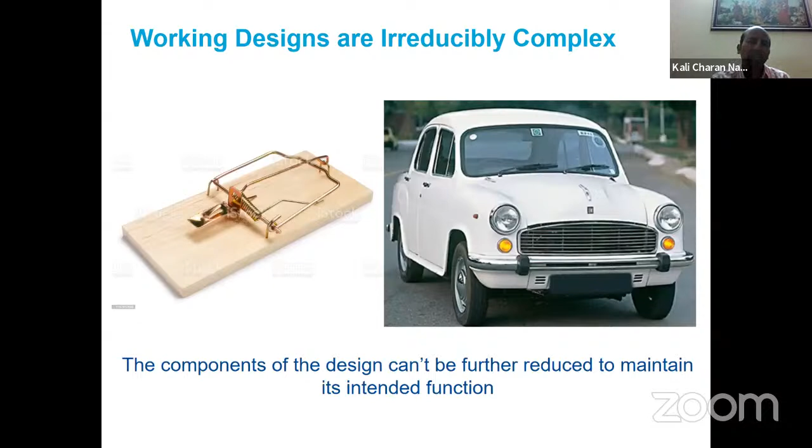For example, in the car we have 4 wheels. If you remove one of the wheels, it is no longer going to work as a car. Similarly, if you look at the mousetrap, it's a simple component with about 5 parts: the platform, the spring, the retaining rod, all that. If you remove any one of these components, for example the spring, it is not going to work. So at the very minimum, this requires these components. That's what is called irreducible complexity - it cannot be further reduced while making sure that this design still works.

So every intelligent design will be having this component or characteristic of irreducible complexity. And beyond that, what we are saying is this design is not coming by chance, or generated out of randomness, and it is not unguided. There is a factor called intelligence into it, and that is when you call it an intelligent design. So one part we discussed is the design - to work, it must be irreducibly complex, meaning it cannot be further simplified. And then there is another factor called intelligence into it.

For example, if you look at Mount Rushmore where there are the pictures of a few presidents of America - if somebody just looks at it, one cannot think that this structure has come just by rain or by deterioration over thousands of years. Somebody may think, okay, somebody had chiseled it using different tools and methods, but one cannot think that these features of the presidents of America on a mountain came just by erosion because of rain. So there is a design part, an intelligence part there. Similarly, one cannot think that a gigantic house is designed just by chance. The point is, in an intelligent design, there is a guided intelligence involved. These are the two important components of an intelligent design.

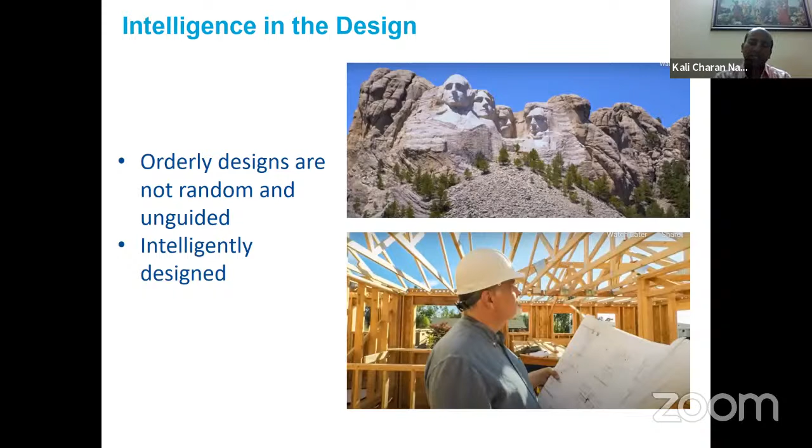Now we will look into a jet engine. Jet engine is definitely one of the marvelous creations of the human mind so far in current existence, and it is ultra complex. If you look at this cross section of a jet engine, it must be having more than 30,000 to 40,000 components. But definitely you cannot remove one of these bolts or nuts from this engine's parts.

Then it is going to create havoc, because this design has a purpose. We'll discuss what is the purpose of this jet engine. But each of the nuts and bolts and the various components in this engine has a role to play.

So an intelligent design is one which is irreducibly complex, and it is designed to perform a certain function. It has a certain purpose in it. So an intelligent design must have a purpose. That is very, very important.

It is not that we are designing these jet engines just out of our interest or something. Definitely not. So in the next 20 to 30 slides, you will see, just by looking at the process of design of a jet engine, how so much is involved.

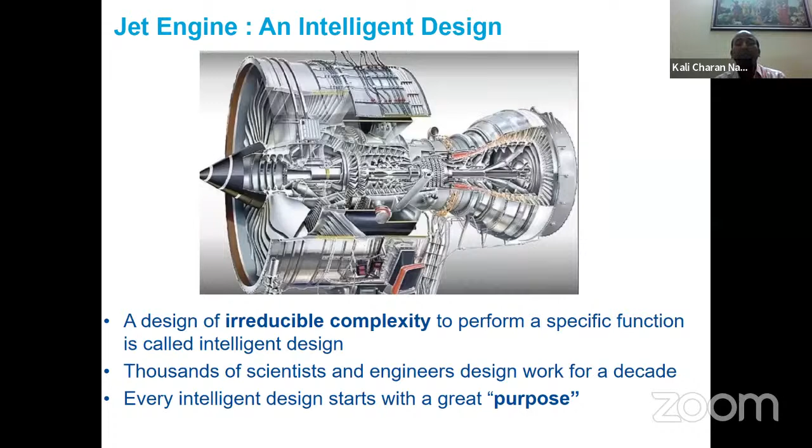So what is the purpose? Here we see an aircraft, maybe a Boeing 787, and these are the two jet engines. So what is the purpose of the jet engine? If I ask somebody from a layman's point of view, they can say what is the purpose of the jet engine. But here is the purpose told by the manufacturers.

Because the designer knows what is the purpose. We may tell something, but the designer knows what is the purpose. So here is the purpose told by GE Aviation. There are three manufacturers which manufacture jet engines: one is GE Aviation, another is Rolls-Royce, and the third company is Pratt & Whitney.

So this is the purpose mentioned by GE Aviation. I was working in that company for 13 years before I moved to Rolls-Royce. So this was what they were mentioning: the purpose of designing these jet engines for GE is not to make profit. You see, they don't say that we have to make profit or we have to build this technology. No, that is not it.

What is the purpose? The purpose is we have to invent the future of flight. Definitely a novel technology we have to develop, but the purpose is to lift people up. So they want to take people from one place to the other, lift them up, and bring them home safely.

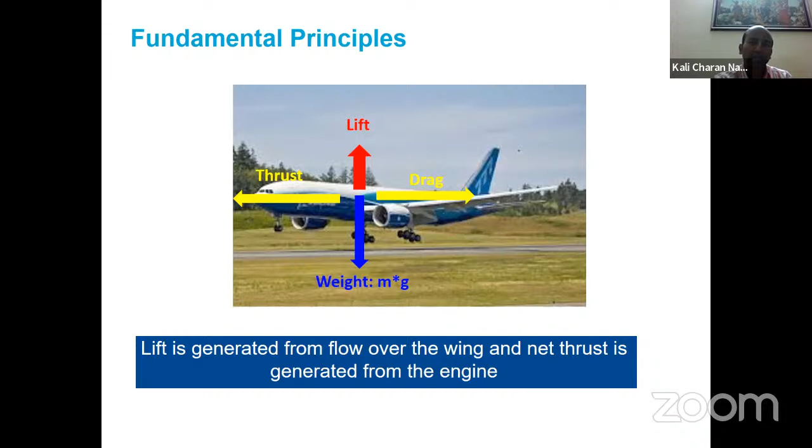So when we go and try to develop this engine, the first thing that comes is the customers. Definitely, the jet engine we develop is not something we use ourselves. We deliver it to our customers like Boeing and Airbus. So they will give the requirement, what they want. When we develop an engine, they will tell the requirement. The first requirement will definitely be the thrust, because they have to transport people from one area to another. So they will say, we need this much of thrust.

And definitely all the customers want to do business without spending anything, right? So they will say, develop an engine so I don't have to spend any fuel. But that is not possible. So instead they will say the fuel consumption should be as low as possible.

And the government agencies and environmentalists have restrictions. So if you are the manufacturer, make sure that you don't pollute our environment. You do business, but make sure you don't pollute the environment. So your smoke, carbon dioxide, or NOx should be at a certain level. At the same time, when you have an airport, the general people will have a complaint. If you have an airport nearby, make sure you don't create so much noise. So there will be a decibel restriction too.

Similarly, the other thing the customer is interested in is making sure the cost is minimal, and at the same time the amount of maintenance is less. They will also expect that at the beginning, when we design an engine, we'll have to tell how many cycles. They will say your engine should operate for 40 years, and the first time I go for a shop visit will be after 5 years. So that is essentially the life of the component. How many cycles? When we say cycles, it is like one takeoff and one landing. That is a cycle, and reliability plays a very important role in jet engines because we are dealing with the lives of people.

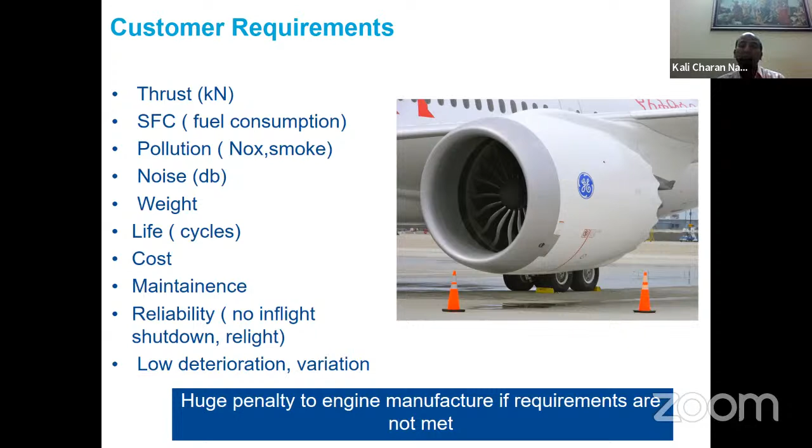But these are the requirements that come at the very beginning. So then how do we meet the requirements? From the purpose, we have got certain principles, and now we have certain requirements. So now we have to start our preliminary design. Preliminary design means we have to have an initial idea - to develop this much amount of thrust, what type of engine we have to build.

So the first is the kind of cycle - the thermodynamic cycle is a Brayton cycle. I don't know how many of you are from a technical background, but I'm trying to explain in layman's terms how much you can understand. So we come with a thermodynamic cycle.

In this thermodynamic analysis, we will essentially try to determine the size of the engine - what will be the fan diameter, what will be the core size - such that the thrust developed will be based on how much air we are taking in and out, and how many stages inside the compressor and turbine. All this will be decided at the beginning based on the thrust requirement, and they will also tell us the fuel consumption, because fuel efficiency is governed by thermodynamic efficiency, which depends on the pressure ratio of the compressor. So the compressor pressure ratio will drive the number of stages.

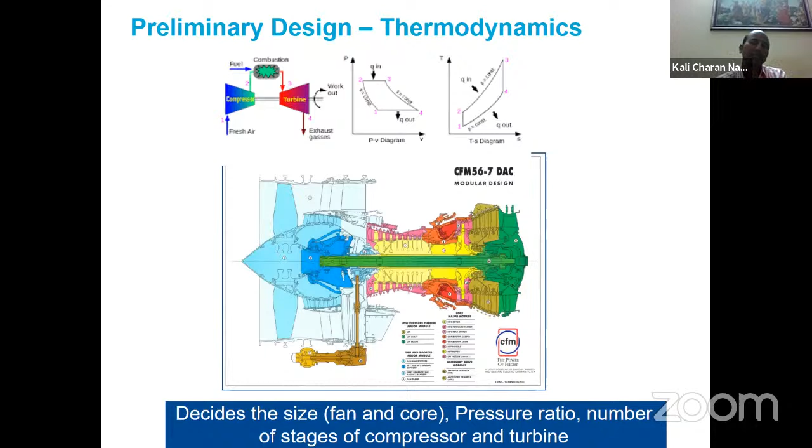So now you can see how those requirements are defining the size of the engine. We should have how many stages, how much length, weight - all this will slowly come out. So this is the preliminary design of the engine.

But at the same time, when we try to design this engine, all we want is whatever the total amount of flow we are taking, everything should be used for generating thrust. But in reality, that is not the only requirement. When we have an engine, there are so many other requirements.

For example, the passengers are sitting inside the cabin. When you are in the flight, they need certain oxygen. So where from will they get the oxygen? We have to supply it from the engine. That is what is called customer bleed - that much amount of flow we have to take out from inside the engine and provide to the customer. Beyond that, there are several other things.

In a thermodynamic cycle, the cycle efficiency will be maximum if we can operate the turbine at the highest temperature. As much higher the temperature, that much higher will be the efficiency of the engine. The technology is so advanced now that we can push the temperature high by putting more fuel into the combustor.

But unfortunately, we don't have materials in nature which can tolerate such high temperatures, like maybe 2000 degrees centigrade. So what do we do? There is an intelligent design which comes in. Essentially, I will cover how we manage that.

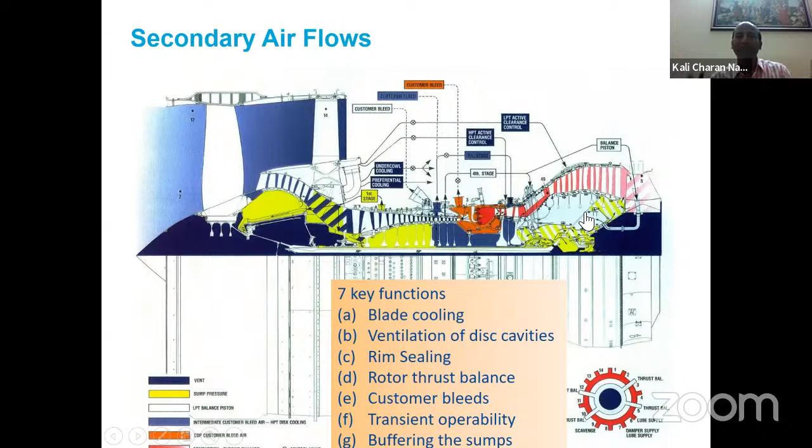It's pretty complex. At the same time, we need to make sure the engine operates for the entire mission. During taxi it goes, then within 20-30 seconds it takes off. That is a period with huge temperature gradient, and the speed will also change significantly between taxiing and takeoff - huge change in speed, temperature, all under extreme conditions.

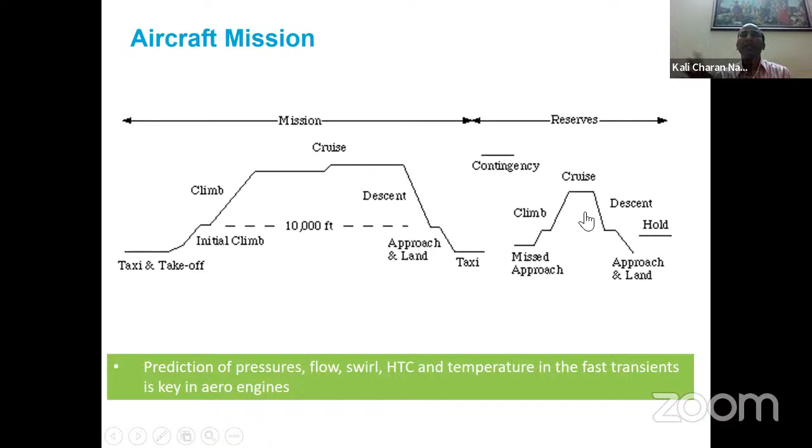We need to make sure the engine is able to operate at such huge temperatures, pressures, and environment, and these transients actually play an important design challenge as well - compared to land-based engines, where such harsh environments are not there.

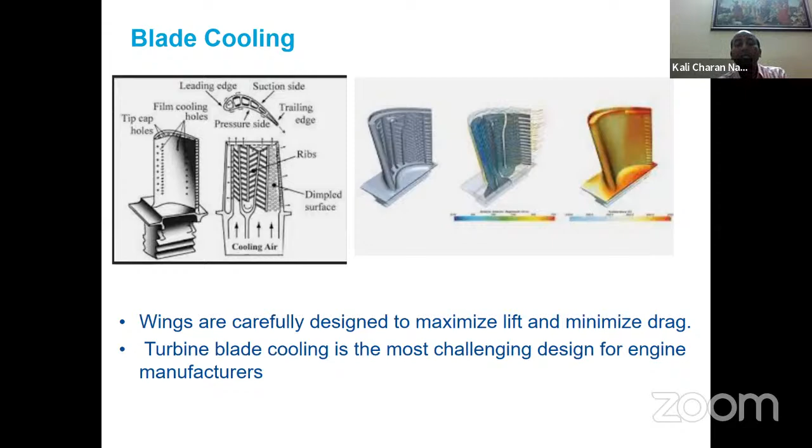So you see, such a wonderful design where you can actually operate the engine at a much higher temperature, but at the same time the material doesn't have to withstand it directly, because you form a thin film of cold sheet of air. But there is a challenge. If there is a high pressure ratio, there are other design challenges. So we have to precisely meet that. It is highly, intelligently designed.

Let me move on, I should not talk too much, might be sounding technical, but I just wanted to give you an idea, we are liking it. I'm just trying to give an idea of how so much effort, thinking, engineering and technology goes into it. It is not that this blade is just like that, or this hole is just like that.

This has a purpose. This is another interesting physics called ingestion. People still don't understand it fully, scientists and engineers still don't understand it. You see this combustion, where you are burning fire, fire is inside the engine, and this fire passes through because that is the source of energy which rotates the turbine. But what happens is this entire hot gas path is very hot, at high temperature, but the point is it is also low pressure.

But what will happen sometimes is there are stator and rotor gaps. In the flow, circumferentially, because there are blades rotating, somewhere you will have high pressure, somewhere low pressure. So sometimes this hot gas can enter into these cavities wherever the pressure is high, and go out wherever the pressure is low. But the problem is this hot gas can enter inside the cavity and go through.

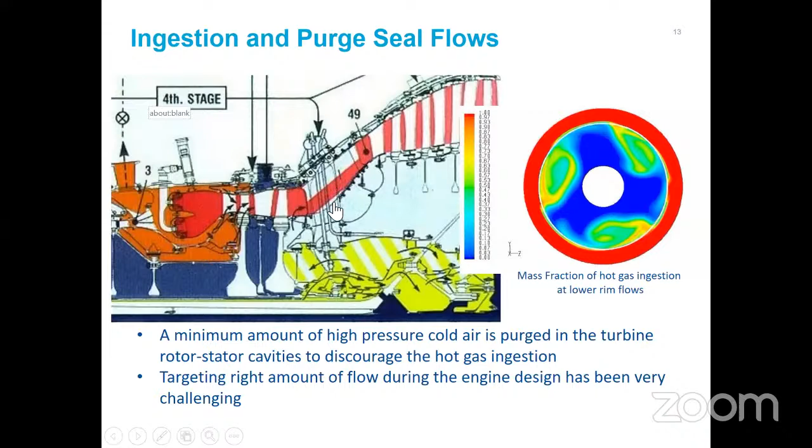So what we do essentially is take some amount of cold flow, which generally comes from this side, from the compressor, so it will have high pressure. So high pressure but low temperature, versus the hot gas which is high temperature, low pressure. So we push this high pressure, low temperature air through these gaps such that the hot gas cannot come in.

But it is not that simple. There are some complex computational fluid dynamics analyses done. Sometimes you see that this hot gas is actually coming inside, this is the low temperature and this is some mixed temperature. But we need to thoroughly understand this, and what is happening in this region is not well understood.

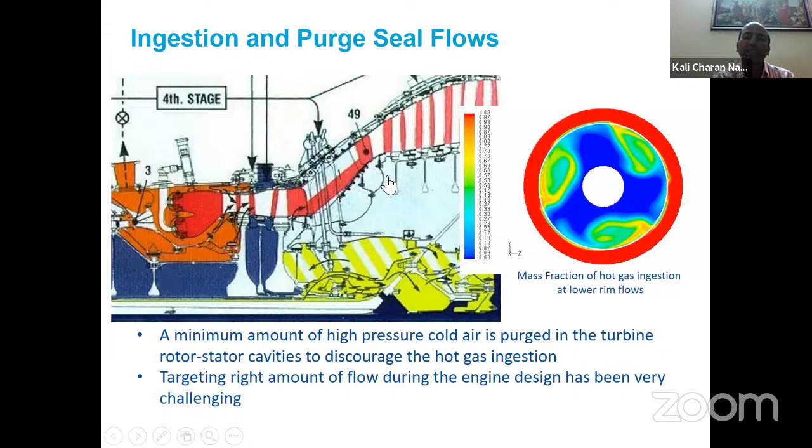So generally what we do is try to push more flow than required. This is another important concept of ingestion, and how much flow you should pass through these gaps plays an important role.

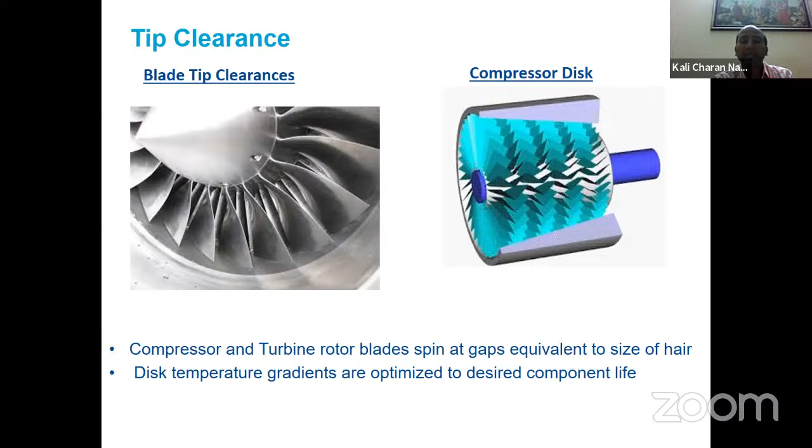So it has to be the design of the compressor, the thermal environment, modeling, all these things - pretty much a good understanding of what is happening in reality, we have to do that. This is again trying to give you some idea of what is happening in these cavities. We have to understand the flow such that we understand what level of heat transfer is happening, because accordingly the temperature of the metal - we understand the temperature and the speed that will drive the growth, because both mechanical and thermal: your temperature is more means it will grow more, and also your speed is more, it will grow more.

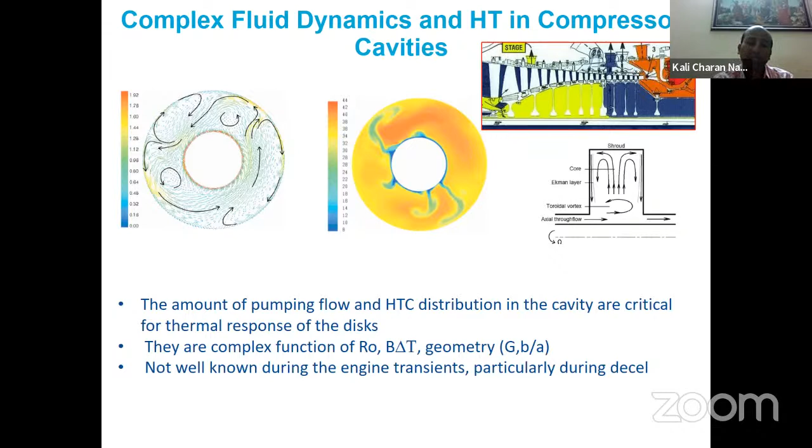So all this physics we have to understand, both analytically and computationally, and we have to do experiments. So many things we have to do really before sizing how much flow should go, how much gap, all that to design this. And this complex level of analysis is required. So I try to give you some flavor of how much analysis gets into the design.

I've given a few examples, but here I'm just trying to summarize what are the various domains, because to design an aircraft or this jet engine, it requires several domains of understanding. A single engineer cannot do it. We need specialists in different domains - like to design the thermodynamics, we discussed the sizing. Somebody has to be a specialist in gas dynamics.

Then air system and heat transfer - these are two of my areas of expertise, where we understand how much cooling flow we have to spend, and how these hot gases are getting into the heat transfer.

Then another is vibration. When the engine is there, it is rotating at such high speed, there will be a lot of vibration. So it should not happen, because of vibration the shaft can fail.

And stress analysis - because of the temperature and rotation, the components will be subjected to huge stresses, mechanical and thermal. So the stress engineer will do that analysis, and based on the stress, they need to declare, using certain criteria like stress versus life, that because of this stress, your part can run for 10,000 cycles or 20,000 cycles.

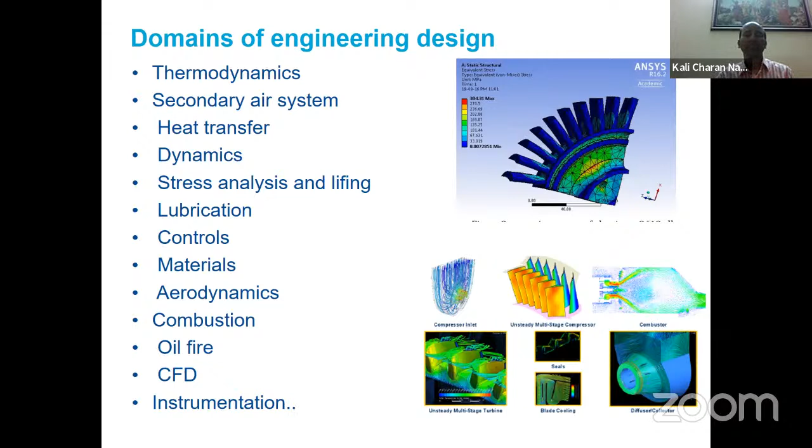So much other computational work, and with all this analysis, this happens during the engine development phase, almost 4 to 5 years, with thousands of engineers in different domain expertise working. All that I explained is the analysis, technology, design part.

But that is not only technology. There has to be some process. We cannot work very randomly. There is project management, and there is a design process. As we discussed, the customer gives the customer requirement. Then the engine, like in our body we have different systems like a circulatory system, nervous system, similarly in the engine we divide into various systems and give that requirement from the product to the system requirement, then system to subsystem, then subsystem to component. Component means like a blade or a disc.

Eventually these components are designed and then manufactured. After manufacturing, the components should undergo component testing to see that the component requirements are met—for example, blade efficiency and blade stresses are met. Once that is done, all the components are assembled, suppose the different parts of a compressor—that's called a subsystem. So the compressor has to be tested to make sure it works together, not as a single part, but as a subsystem, like delivering the pressure ratio required. But not only the subsystem—the full system should deliver, and eventually when all the systems are met together, it becomes the product. The product is manufactured, assembled, and eventually gets tested.

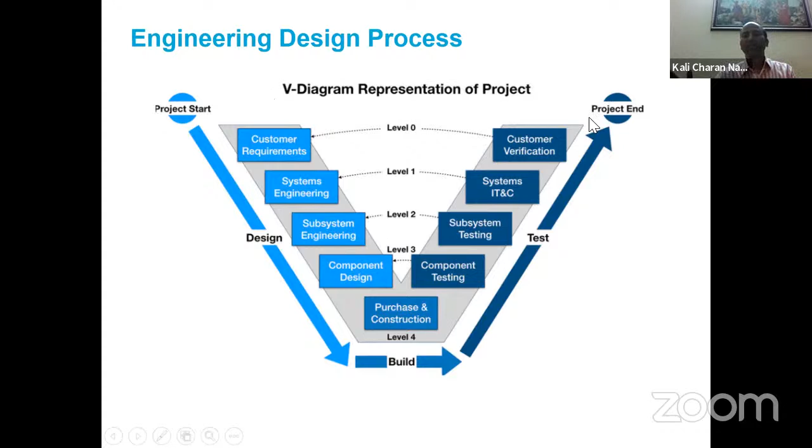This is what is called the engineering V—that's the design process. It goes through design and verification, both design and verification. As I mentioned, all these things must be planned properly; we cannot do things randomly. There is a separate department called project management, with different roles: project engineers, senior project engineers, chief design engineers. All these people do periodic reviews every week, checking things.

But eventually, what is the goal? The goal is the entire design must be completed in a given time, say 7 to 8 years. It must be done. We cannot commit to the manufacturer that we'll deliver the engine after 8 years and then take 10 or 13 years—that's not going to work. And when you take more time, there's also cost associated with it. So we have to meet the engine development cost, and quality is so important for a jet engine where we are dealing with life. All this must be meticulously planned.

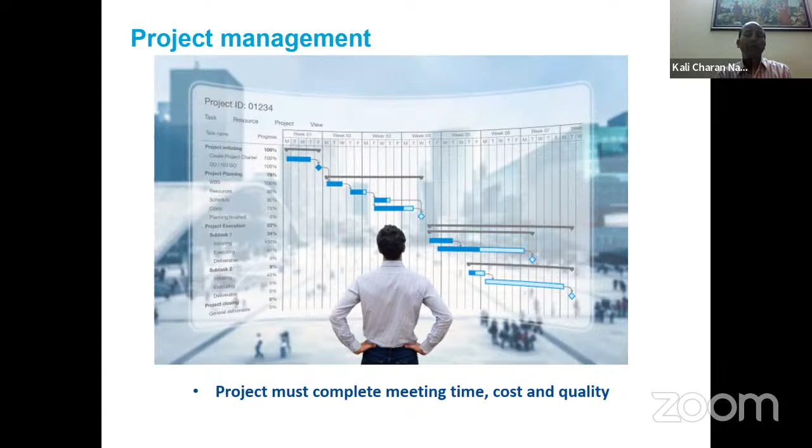We cannot just say, 'I'm doing the design very nicely, I know I'm doing the best.' No, we cannot say that. We have to take it to the senior chief design engineers or chief project engineers, who will be reviewing. There are constant reviews and audits of the design we are doing—we'll be challenged on what analysis we've done and what results we've got. These reviewing engineers have not only studied, like master's or PhD, but have also worked beyond that for another 30, 35 years. Our chief engineer has almost 35 years of experience.

So that person has almost 70 years combined experience in study and design, and has definitely contributed to multiple engine designs. From all this, you can understand the complexity of the design process and analysis process—how it has to be properly planned and reviewed. So much goes into the design of the engine, and then eventually it gets into manufacturing. Once it is manufactured and assembled, it goes into a test bed where we put various instrumentation to measure whatever we wanted.

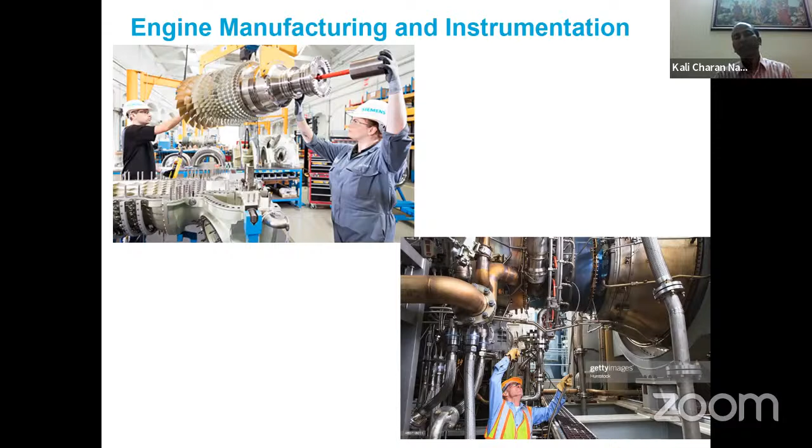So there are several engine tests we will have to do. I have just given a few examples. This testing itself takes a couple of years, almost two to three years of rigorous testing, to make sure we are getting the required parameters. Also, it is meeting the hot and harsh environment. Say, for example, you might have heard that a bird gets ingested inside the engine in flight.

There was a failure, or an in-flight shutdown. So in reality we do bird ingestion tests. When a flight is going from India to America, there are various environments. At certain places there are icing conditions, rain. So for this, an anti-ice system is designed, but at the same time we must check whether the operability is maintained. Similarly, we design the engine in ground conditions, but when we take it into flight, we check whether the engine is delivering the required parameters or not.

So there are so many engine tests done, for thousands of cycles, almost 20 to 30 engines are used in this process. If the engine is good, they will sell it, but several engines are also used to develop or test. All I was trying to explain is how much gets into designing this jet engine.

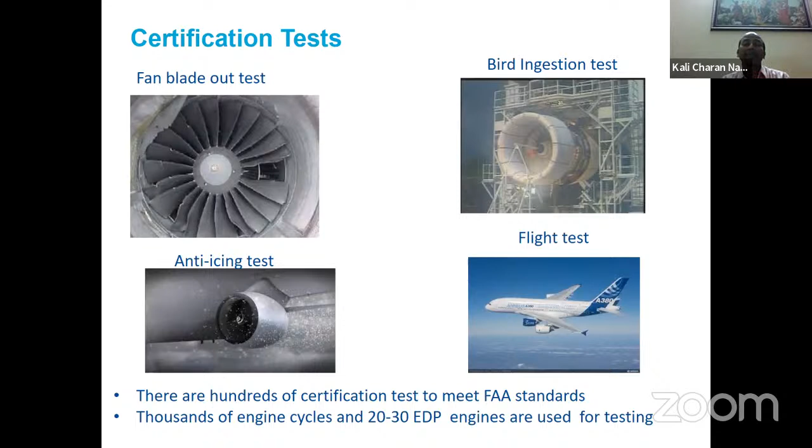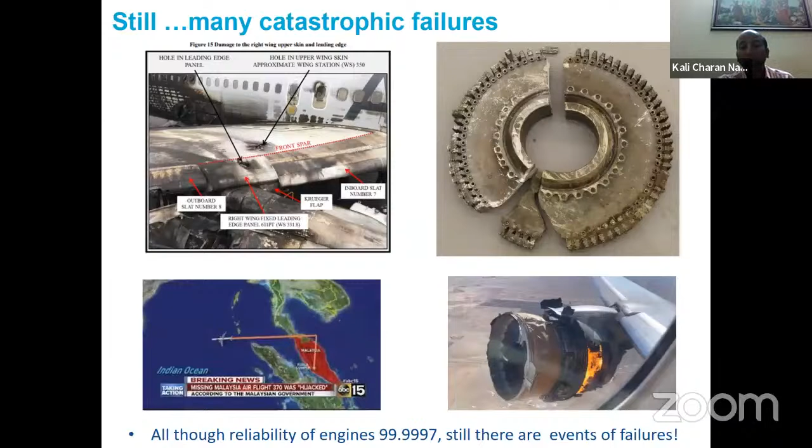However, the point is that human design will always have a fault. That's what we see, that's what is happening, although we are putting so much intelligence into it. But now the question is...

After working 20 years in jet engine analysis, design, and testing, I would not say these birds have come by chance. Definitely they are intelligently designed. But it's very interesting that these designs are also intelligent themselves - not just intelligently designed, but the design itself is intelligent, like these birds are intelligent, like we humans are intelligent. Such a thing is not there in the creation of modern scientists, engineers, or technologists. So we should not loosely say these creations came by chance or by evolution like Darwin.

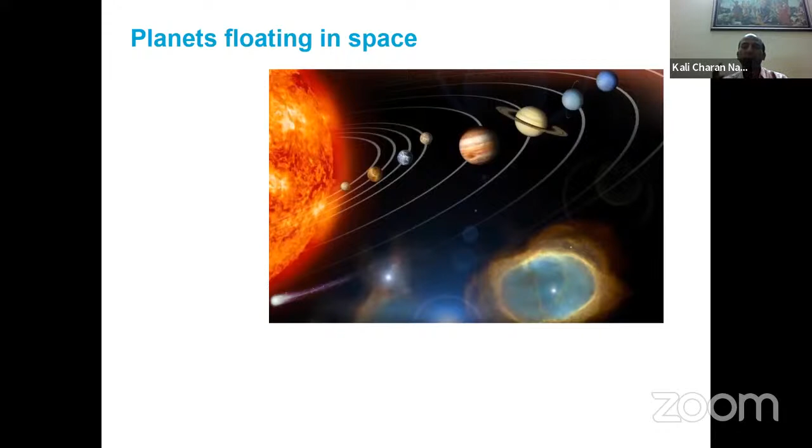Not only me, there are great scientists like Newton. When he looked at this orderly creation, he mentioned that this most beautiful system of the creation - sun, planet, and comet - only proceed from the counsel and dominion of an intelligent and powerful being. Newton is saying that this wonderful creation, how orderly it works, the planets rotating and moving, must be coming from the counsel and dominion of an intelligent, vastly superior being - at least superior to the intelligence of this creation.

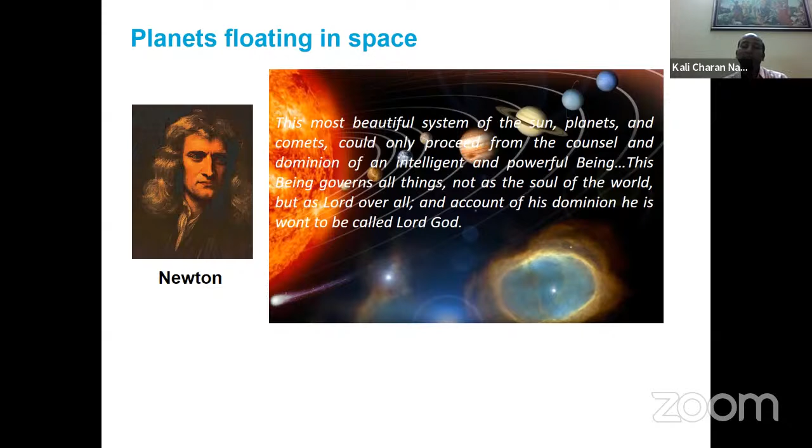Einstein also says that everyone who is seriously involved in the pursuit of science must be convinced that a spirit is manifest in the laws of the universe. One who is seriously pursuing science is trying to understand the truth - it doesn't matter whether it's science or spirituality, both are trying to understand the truth of nature. So if somebody really pursues science and understands the laws of the universe and its creation, he will definitely be convinced there is an intelligent designer - that is the spirit mentioned here. And that spirit or intelligent designer must be vastly superior to man, which is the creation. Definitely the intelligence of the designer must be vastly superior than that of the design, at least. That's what Einstein is telling, and he calls that God.

I think we have spent a good amount of time, but can I take another 10-15 minutes? Yeah, please, you can take as long as you like. We have time, there is no limit.

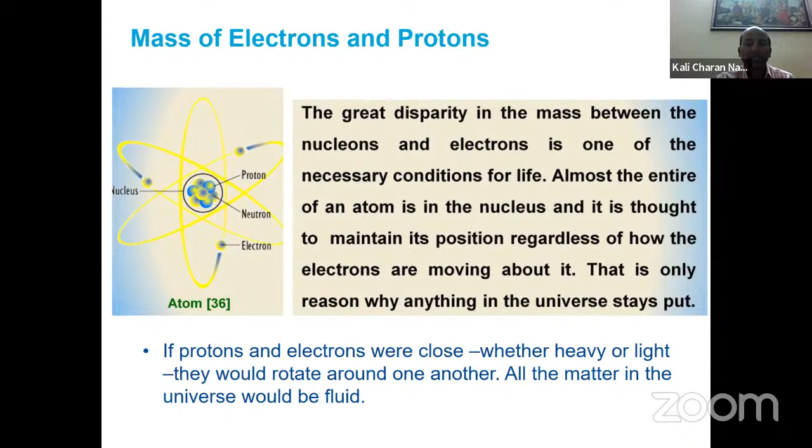1836, or around 2,000 times. So definitely there must be an intelligent design. This is what one of the Nobel laureates said. So again, look at the charge of the electron and proton.

Interestingly, the masses are so much different, but how are the charges of the electron and proton? One is positive and negative, but the value is exactly the same.

And here, one of the Nobel laureates - there is one book by our teacher, our spiritual teacher, Dr. T.D. Singh. He has compiled the writings of 7 Nobel laureates.

So there, one of the Nobel laureates is saying that if the charge of either the electron or proton had been slightly different, say for example 2 into 10 to the minus 18 times the electron charge, then because of such a small difference, and these electrons or protons revolving at such high speed, whatever force resulted from the difference in charge would have been so high that it would have overcome gravity.

That means everything would be flying apart - no galaxies, no stars, no planets. And he is saying this, it is not me saying it, these are his words. He's telling physicists - he's making jokes at the physicists - that you must understand, not just study the motion of electrons, protons, and their charge values, but you should understand why and how.

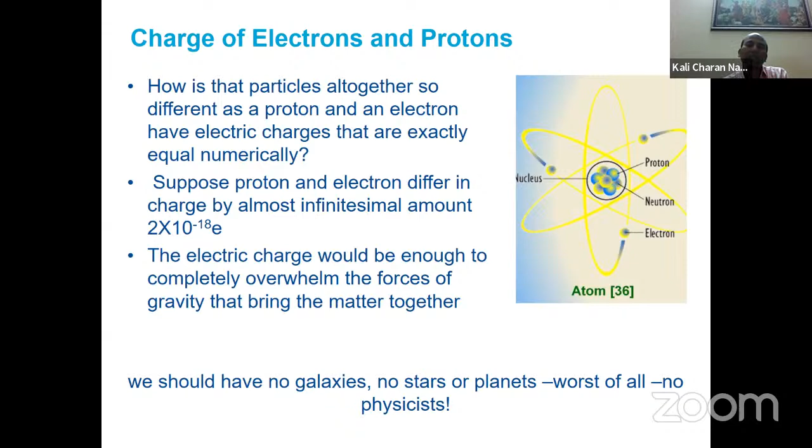So this is how electrons and protons are intelligently designed, because these are the fundamental particles. They are kind of the building blocks of the universe. If the foundation is not strong, then the entire universe itself will not exist. Very, very fundamental and very nice things.

And if we look at this creation, the various matters are composed of these 4 fundamental elements - carbon, hydrogen, nitrogen, oxygen. 99% of it is made out of this, and these lightest elements have strong bonds.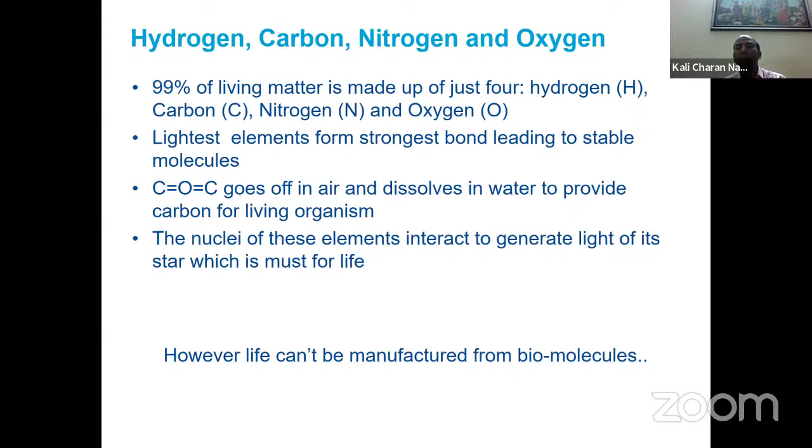So the amazing thing is how these four fundamental elements, particularly carbon and hydrogen, are leading to - many biochemists or biologists think that life has evolved from this. They say, okay, from this you can manufacture protein molecules and all this, and eventually life can evolve after so many billion years. But definitely that is not the case. So life cannot be manufactured from these biomolecules.

That's a topic for another session. This is very interesting, very amazing - water. Without water, we cannot survive. Without water, we cannot survive.

And we know how nicely this H2O bond angle is - 104.5 degrees. So precisely this angle is there. It is amazing. And every solid substance, if you put it in its liquid form - suppose if you put solid iron in liquid iron, it will actually sink inside. But if we put ice over water, it floats.

Is it not amazing? Every other solid just sinks inside its liquid, but in case of ice, it is floating. Oh, you may say, 'I know this' - no, you do not know, sir. Actually, the density of ice is less. Yes, I also know that. But who made it that way? Why is the density of ice less? That is the question - why is the structure of ice made like that?

Do you have an answer? Definitely, this must be designed. Suppose if ice also was sinking in water, what would happen? So in the ocean, we have so many living elements, living creatures.

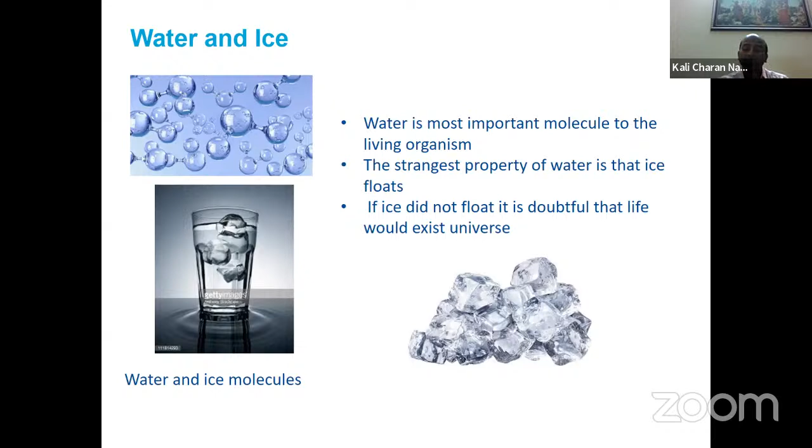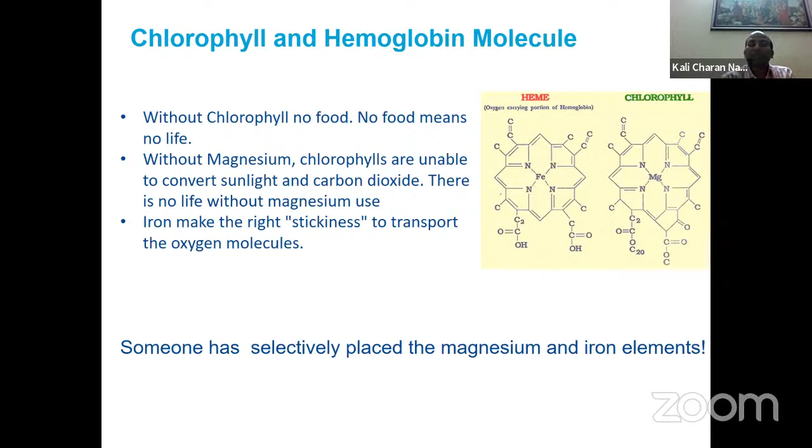And similarly, if inside the hemoglobin this iron is not there, definitely our circulation system will not be working as it is working now. So from all this, we should understand how nicely this iron and magnesium are placed. So somebody must have selected and placed them at the required position. So amazing, chlorophyll and hemoglobin - those are some examples in creation of fundamental things, how we see that they are intelligently designed.

Why is it getting repeated? Sorry, from my side it's okay, I can hear properly. Maybe now is better. Yeah, now it is. Okay, sorry, maybe I opened some software, that's why.

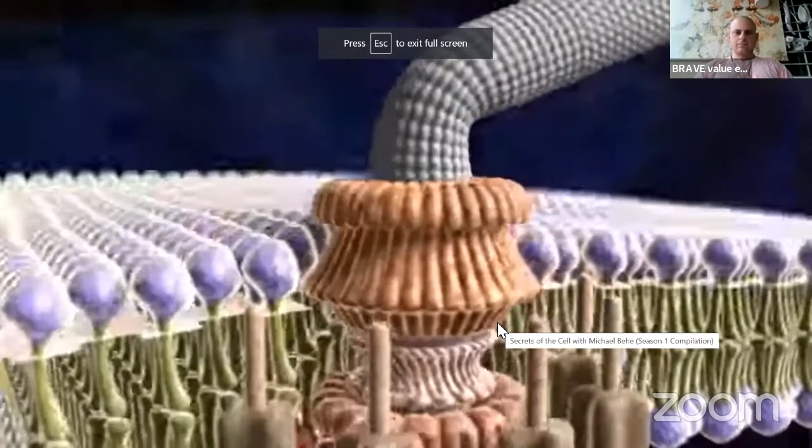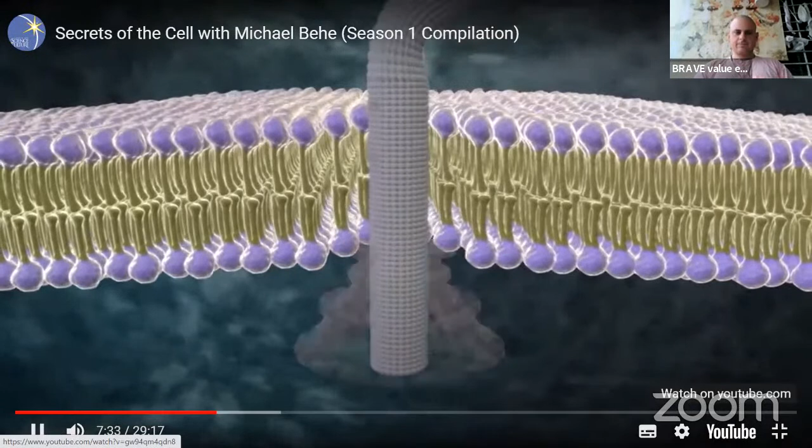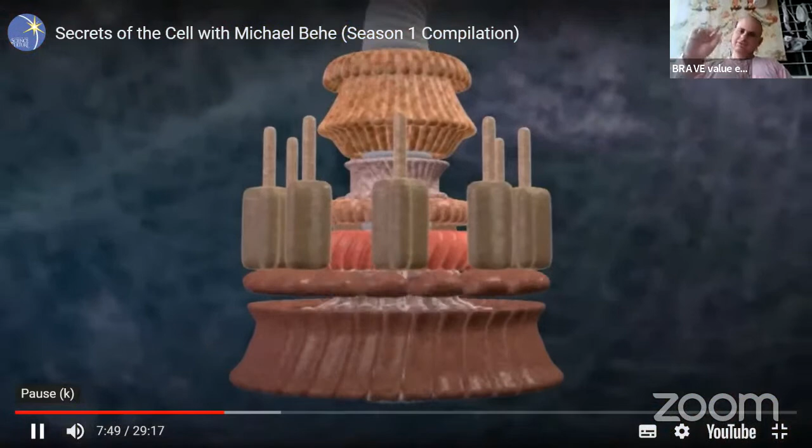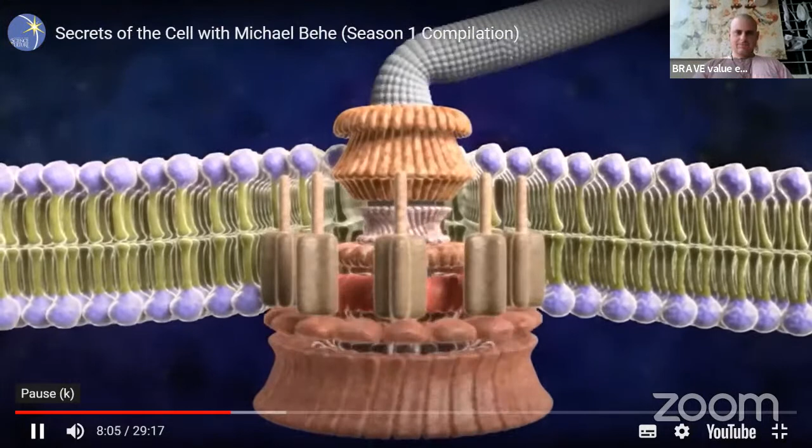Motor on a boat - it rotates to propel bacteria through liquid, necessary for survival in order to swim to search for food. Flagellum has a number of parts: a drive shaft, a universal joint, a rotor, bushings, a stator, even a clutch and braking system. The motor of the flagellum has been clocked at 100,000 revolutions per minute. And as with the mousetrap, removing even one component of this elegant machine destroys its functions and renders the bacterium, shall we say, dead in the water. The flagellum is irreducibly complex.

Maybe there's some setting you have to check. Yeah, there is some problem, it is repeating - there's some sound problem again. Maybe I can share the link.

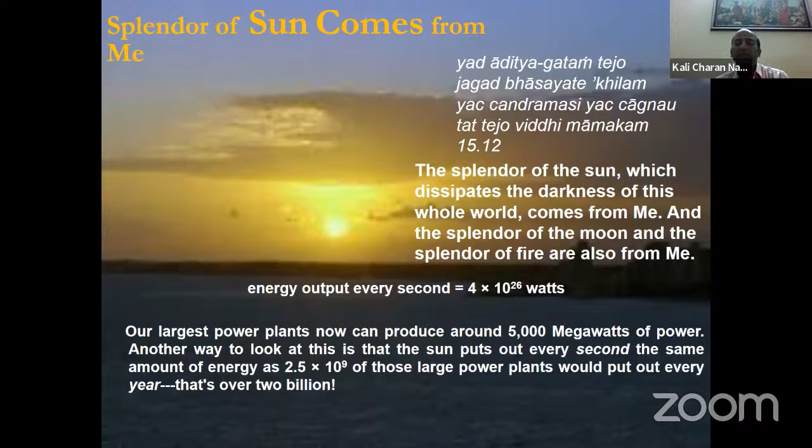In another place, we see for our survival we definitely need sunlight. If we don't have sunlight, we cannot survive. Another thing is the moonlight. Why is the moon there? Here the Lord is saying the moon is the cause of supplying juice.

Juice means whatever we see in these vegetables. Pusnami chaushadi sarvam somo bhutva rasatmakaha. Rasa, all the juice, whatever we see in the fruits and vegetables, all of this is coming from the moon.

We may not have an idea, but there is a PhD scholar who says that because of the lunar cycles, the gravitational pull is created in the land, and during full moon and new moon time, more moisture is stored in the soil. Maybe I don't know about the other details, but if we believe this person, and also have faith in the Lord's statement...

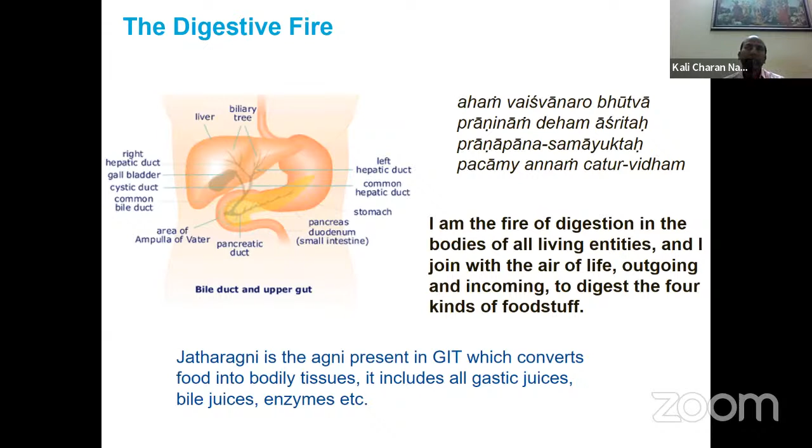That digestive fire is able to digest four different kinds of foodstuff - eating, chewing, licking, drinking - all the different types of food we take. Everything is digested in this digestive tract because of the digestive fire. This is jatharagni, the agni in the GIT which is responsible for digestion of the foodstuff. So even if we eat so much food, if it is not getting digested and assimilated, what will happen to our fate? We can see such a wonderful digestive system, and the digestive fire is designed in this intelligent design of the human being.

Similarly, we see there are several wonderful systems. Like we saw in the aircraft engine, there are various systems. Here also in this human body, in almost all mammals, there are so many systems - digestive system, immunity system, nervous system, circulatory system, so many systems, reproductive system. I'm really amazed looking at this heart, because I look at it as a mechanical engineer.

This heart acts like a pump, like a compressor. But in our aircraft engine, we have a compressor and we also have a turbine, because the compressor requires energy to rotate or to compress. But how is this heart pumping? Where from? What is the machine giving energy to the heart? Can anybody say? No idea.

Similarly, we have this nervous system. So in recent times, we are working on artificial intelligence, trying to mimic how neurons are working, how there are different layers in the human nervous system. There is just a very elementary stage to understand how these human neurons are working. But even with that basic understanding, we can have only a few layers of neural network in our artificial intelligence. But in humans, there are so many layers of network, complexly connected. And we know from artificial intelligence that if you just keep increasing the number of layers, the computation cost is so high.

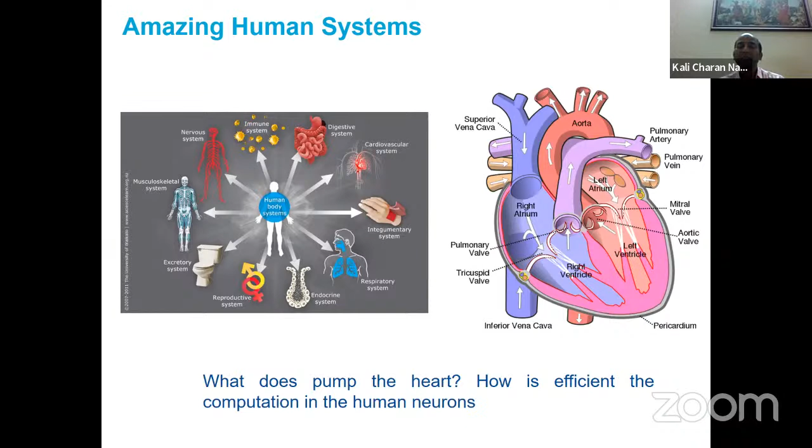But how efficiently our human intelligence, this nervous system, is working with so much less computation power. So definitely somebody must have designed this nervous system like that. And all this very coordinately, how they are nicely working - like somebody pinches at one place, all of a sudden within no time there is very good coordination among all these various systems. So a doctor or biologist will appreciate this much more than me. I just look at the mechanical aspect, but even from this single example of heart or the nervous system, it shows amazing how our body system is designed.

So similarly, the eye - one interesting fact I'd like to share, you'll be surprised to know. When I was studying in my 11th, 12th class, I had biology. The teacher told us that when the body is formed, do you know the very first organ that is formed in the embryo? Heart, yeah, it's the heart.

And the heart has a sub-brain. That means before the brain is formed, before the brain gives a signal to the heart to pump, the heart has an inbuilt brain, very basic, which gives the direction to pump, that you have to pump blood. So before the brain is formed, the heart is the first organ.

So the surprising point is that at that time I was reading Bhagavad Gita. In the Bhagavad Gita, Lord Krishna is saying, Sarvasya chaham hridi sannivishto, that I am situated within the heart. Ishvara sarva bhutanam hrid-deshe, that the Lord is situated within the heart. And also we, the soul, the jiva atma, we are also situated in the heart. So when I heard that in my biology class, it was amazing - I was convinced that Bhagavad Gita already is saying that we are in the heart.